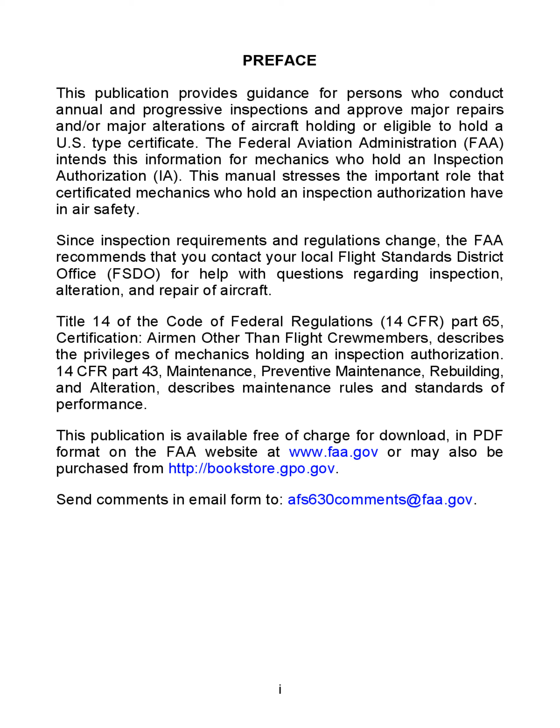This publication is available free of charge for download in PDF format on the FAA website at www.faa.gov, or may also be purchased from http://bookstore.gpo.gov. Send comments via email to afs630comments@faa.gov. Chapter 1: Renewal and Change of Fixed Base, Notification of Change of Fixed Base.

When the holder of an inspection authorization, IA, moves the base of operation to a different Flight Standards District Office, FSDO, or International Field Office, IFO, area, the receiving office must be notified in writing before exercising the privileges of the authorization. Expiration of an inspection authorization.

The IA expires every odd-numbered year, 2015, 2017, etc., on March 31st. An IA holder must continue to meet the yearly requirements of Title 14 Code of Federal Regulations, 14 CFR, Part 65, Section 65.93, in order to retain the authorization. Yearly means April 1st through March 31st.

Renewal of inspection authorization. Renewal application paperwork. Application for renewal requires the following: 1. Evidence the applicant still meets the requirements of 14 CFR Section 65.91c, 1 through 4. 2. Completed FAA Form 8610-1, Mechanic's Application for Inspection Authorization, in duplicate. Refer to Appendix 1, Figure 1.

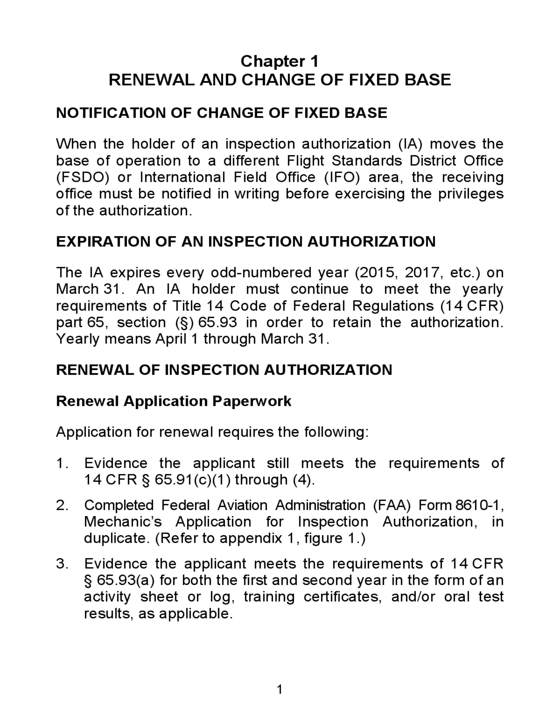3. Evidence the applicant meets the requirements of 14 CFR Section 65.93a for both the first and second year, in the form of an activity sheet or log, training certificates, and/or oral test results, as applicable. 4. Verification of the applicant's activities by the jurisdictional FSDO or IFO for renewal at an office other than the jurisdictional office. 5. Evidence that an applicant employed by a repair station personally inspected, performed, and returned aircraft to service, in addition to the signed application.

Eligibility. Meeting the requirements of 14 CFR Section 65.93 does not mean that the applicant must meet all 5 of the listed requirements. To be eligible for renewal of an IA for a 2-year period, the applicant must show completion of one of the activities by March 31st of the first year and completion of one during the second year.

For instance, the applicant may show evidence of having performed at least one annual inspection for each 90 days during the first year and meet the same requirement for the second year, for a total of 8 annuals prior to the renewal date to qualify for renewal.

The same logic applies to major repairs and major alterations or training. The number of annual inspections, major repairs, and major alterations performed cannot be mixed to meet a single year's requirement, simply because 14 CFR Section 65.93 does not provide for such combinations. However, the applicant can meet one requirement of 14 CFR Section 65.93a for the first year and a different requirement for the second year to qualify for renewal.

Note: an inspection program required under 14 CFR Part 91, Section 91.409e, is not acceptable as IA activity. Partial inspections, such as phases or events on more than one aircraft, are not acceptable as activity. A progressive inspection is a complete inspection on one identified aircraft that completes a cycle each 12 calendar months.

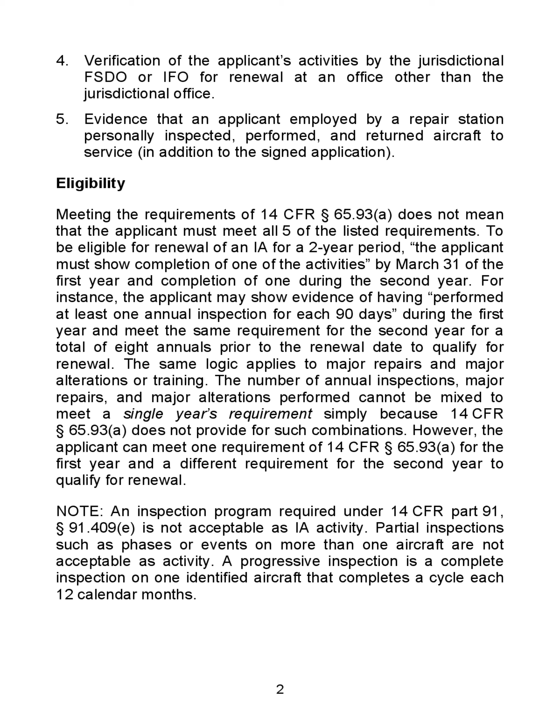Approved training renewal option. Successful completion of an 8-hour refresher course, acceptable to the Administrator, in one of the 12-month periods preceding the renewal application, includes the following requirements: 1. The refresher course must contain subjects directly related to aircraft maintenance, inspection, repairs, and alterations. In addition, some non-technical subjects, such as human factors or professionalism as they relate to maintenance personnel, may be acceptable. Training must not be used to promote a new or existing product.

2. The instructional requirements of Section 65.93a(4) may be met by accumulating at least 8 hours of maintenance training each year.

Each person who intends to use 8 hours of instruction each year to meet Section 65.93a(4) must, at the time of renewal, provide proof of attendance for instruction received. Acceptable proof of attendance consists of a certificate of training or similar document showing the name of the course, name of attendee, course identification number, expiration date, description of the course content, time in hours, the date, location, and course instructor's name and signature.

All FSDOs and IFOs must accept, without further showing, maintenance technical training conducted by a manufacturer or its authorized representative on its Type Certificate (TC), Supplemental Type Certificate (STC), Technical Standard Order (TSO), or Parts Manufacturer Approval (PMA) product, component, or accessory that is considered acceptable to the administrator and in compliance with this policy.

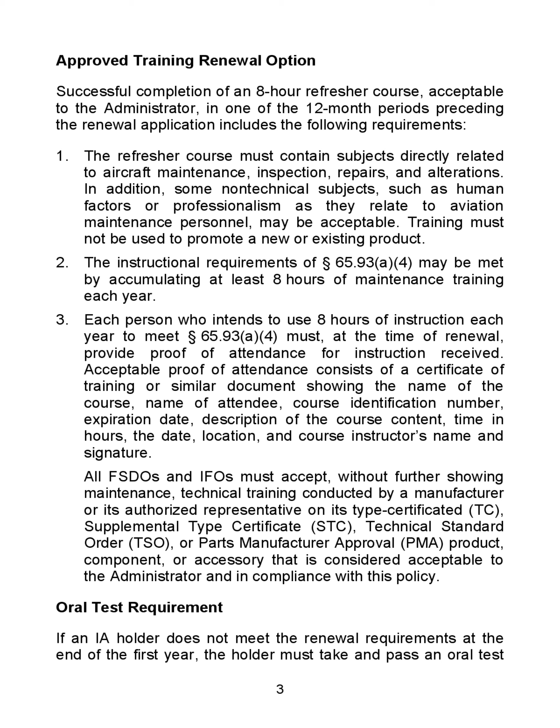Oral test requirement. If an IA holder does not meet the renewal requirements at the end of the first year, the holder must take and pass an oral test administered at their local Flight Standards District Office or International Field Office prior to exercising the privileges of their certificate in the second year. The oral test, given by an Aviation Safety Inspector (ASI), is to ensure that the applicant's knowledge of regulations and standards are current, and requires a passing grade of 70%.

A failure of the oral test will result in non-renewal of the IA. The ASI administering the oral test will provide the IA with evidence of passing or failing the test in the form of written documentation. The applicant should retain the oral test results.

Renewal notes. First year note: the holder of an IA issued less than 90 days before March 31st of the first, even year, need not comply with Section 65.93a(1) through (5) for the first year of the 2-year authorization period. Second year note: the holder of an IA issued less than 90 days before the expiration date, March 31st of the odd year, does not need to comply with Section 65.93a(1) through (5) for that quarter, but the IA holder still needs to apply for a renewal.

A completed example of the IA authorization card, FAA Form 8310-5, is shown in Appendix 1, Figure 2.

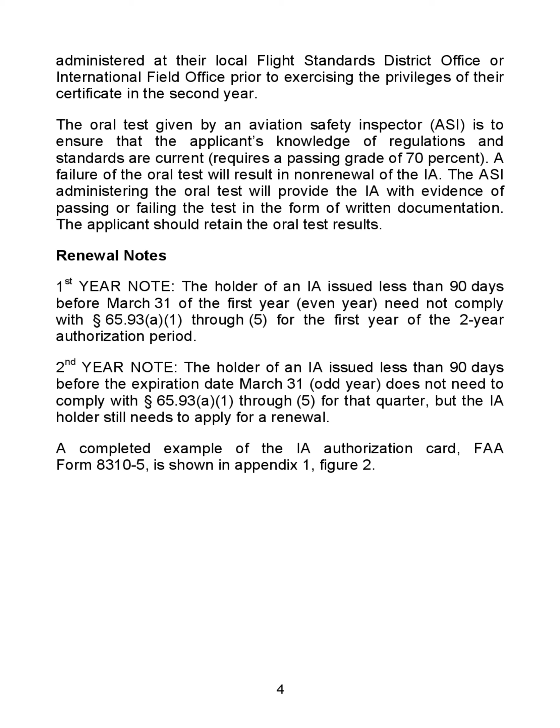Chapter 2: Basic Functions of the Inspection Authorization. General. The basic functions of the holder of an Inspection Authorization (IA) are set forth in Title 14 of the Code of Federal Regulations, 14 CFR, Part 65, Section 65.95.

With the exception of aircraft maintained in accordance with a continuous airworthiness maintenance program under Part 121, an IA may inspect and approve for return to service any aircraft or related part or appliance after a major repair or major alteration. Also, the holder of an IA may perform an annual inspection and may supervise or perform a progressive inspection. Approving major repairs and major alterations: what to look for during an inspection.

A primary responsibility of the holder of an IA is to determine airworthiness by inspecting repairs or alterations for conformity to approved data, and assuring that the aircraft is in a condition for safe operation. During inspection of major repairs or major alterations, the holder of an IA must also determine that they are compatible with previous repairs and alterations that have been made to the aircraft.

The holder of an IA must personally perform the inspection. The regulations do not provide for delegation of this responsibility. Approving major repairs and major alterations is a serious responsibility. The approval action should consist of a detailed investigation to establish at least that...

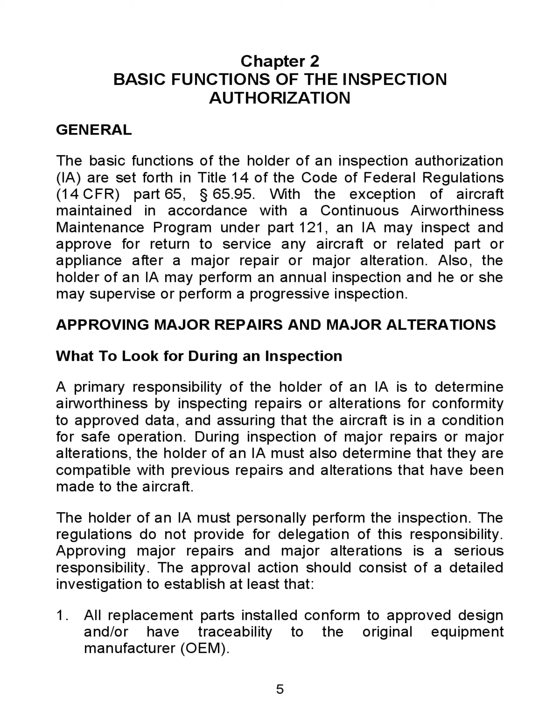1. All replacement parts installed conform to approved design and/or have traceability to the original equipment manufacturer (OEM). 2. As installed, the installation conforms to approved data that is applicable to the installation. 3. Workmanship meets the requirements of 14 CFR Part 43, Section 43.13. The aircraft or product is equal to its original or properly altered condition.

4. The data used is appropriate to the Aircraft Certification Rule, CAR 3, 14 CFR Part 23, etc. 5. Work is complete and compatible with other structures or systems.

The holder of an IA cannot approve the data for major repairs or major alterations. He or she may, however, inspect to see that alterations conform to data previously approved by the administrator, per 14 CFR Part 65, Section 65.95. This means the holder of an IA ensures that approved data is available and is used as the basis for the approval. This availability determination should be made prior to beginning the repair or alteration.

If data is unavailable, or if the holder of an IA is unsure of the acceptability of the available data, the local Aviation Safety Inspector (ASI) should be consulted.

The ASI may, as circumstances warrant, be able to: one, establish an acceptable basis for approval; two, approve the data; or three, recommend application for a supplemental type certificate.

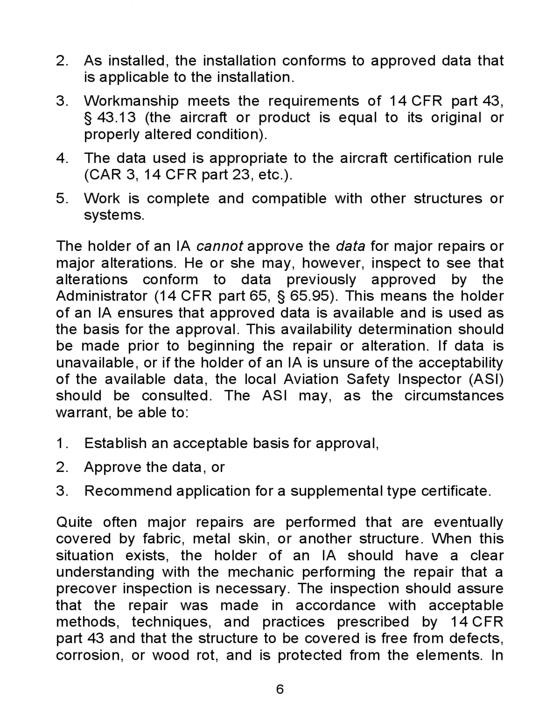The inspection should assure that the repair was made in accordance with acceptable methods, techniques, and practices prescribed by 14 CFR Part 43, and that the structure to be covered is free from defects, corrosion, or wood rot, and is protected from the elements. In addition, the holder should inspect other affected areas for hidden damage if the aircraft has been involved in an accident or incident.

An entry is required to be made in the maintenance record, and FAA Form 337, Major Repair and Alteration, must be completed. Refer to Appendix 1, Figure 3, showing typical entries on the front and back of FAA Form 337.

Minor deviation from approved data is permissible if the change is one that could be approved as a minor alteration when considered alone. Be sure to list the deviations on FAA Form 337 and make an entry in the maintenance record when completing the aircraft records. When in doubt, contact the local ASI, who may decide the change is not minor and would need specific approval or an amendment of the original approval.

Approved data: substantiating and descriptive technical data sources used to make a major repair or alteration that is approved by the administrator include those on the following list.

One, Type Certificate Data Sheets, TCDS. Two, Supplemental Type Certificate, STC, data, provided it specifically applies to the item being repaired or altered. Such data may be used in whole or in part as included within the design data associated with the STC. Three, appliance manufacturers' manuals or instructions, unless specifically not approved by the administrator, are approved for major repairs.

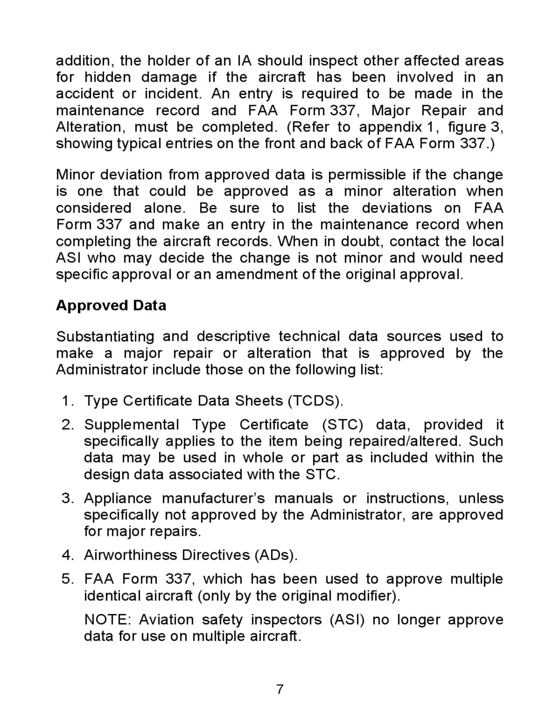Six, U.S. Civil Aviation Authority, CAA, Form 337, dated before October 1, 1955. Seven, FAA-approved portions of SRMs. Eight, Designated Engineering Representative, DER-approved data, only when approval is authorized under his or her specific delegation. Nine, Organization Designation Authorization, ODA-approved data, when the major alteration is performed specific to the authorization granted.

Ten, data in the form of an appliance type approval issued by the Minister of Transport Canada for those parts or appliances for which there is no current Technical Standard Order, TSO, available. The installation manual provided with the appliance includes the Transport Canada certificate, as well as the date of issuance and an environmental qualification statement.

Eleven, foreign bulletins, for use on U.S. certificated foreign aircraft, when approved by the foreign authority. Twelve, data describing an article or appliance used in an alteration that is FAA approved under a TSO. As such, the conditions and tests required for TSO approval of an article are minimum performance standards.

The article may be installed only if further evaluation by the operator or applicant documents an acceptable installation which may be approved by the administrator. Thirteen, data describing a part or appliance used in an alteration which is FAA approved under a Parts Manufacturer Approval, PMA. An STC may be required to obtain a PMA as a means of assessing airworthiness and/or performance of the part.

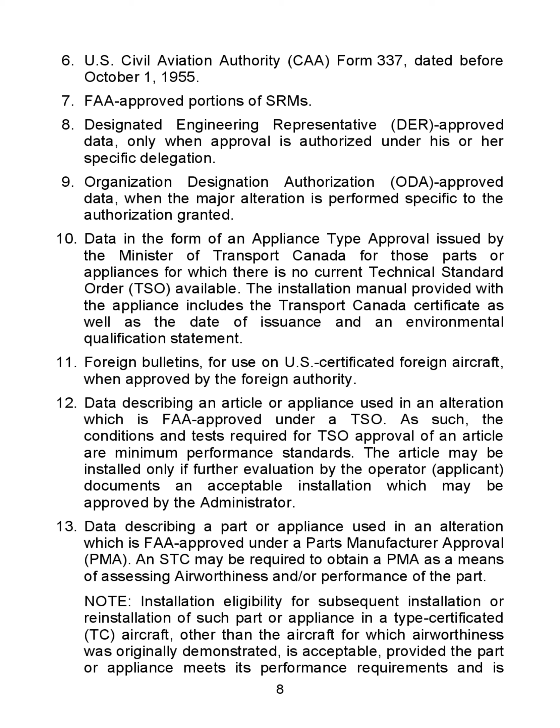Note: installation eligibility for subsequent installation or reinstallation of such part or appliance in a type certificated aircraft, other than the aircraft for which airworthiness was originally demonstrated, is acceptable, provided the part or appliance meets its performance requirements and is operationally compatible for installation.

The operator or applicant must provide evidence of previously approved installation by TC, STC, or field approval on FAA Form 337, that will serve as a basis for follow-on field approval.

Fourteen, any FAA-approved service bulletins, SB, and letters or similar documents, including DER approvals. Fifteen, foreign bulletins as applied to a U.S. certificated product made by a foreign manufacturer located within a country with whom a bilateral agreement, BA, is in place, and by letter of specific authorization issued by the Foreign Civil Air Authority.

The bilateral website is located at http://www.faa.gov/aircraft/air_cert/international/bilateral_agreements/baa_basa_listing. Sixteen, other data approved by the administrator. Seventeen, Advisory Circular, AC, 43.13-1, current edition, for FAA-approved major repairs on non-pressurized areas of aircraft only, when the user determines that it is...

Appropriate to the product being repaired, directly applicable to the repair being made, and not contrary to the airframe, engine, propeller, product, or appliance manufacturer's data.

18. AC 43.13-2, Current Edition, for FAA-approved major alterations on non-pressurized areas of aircraft 12,500 pounds gross weight or less, only when the user determines that it is appropriate to the product being repaired, directly applicable to the alteration being made, and not contrary to the airframe, engine, propeller, product, or appliance manufacturer's data.

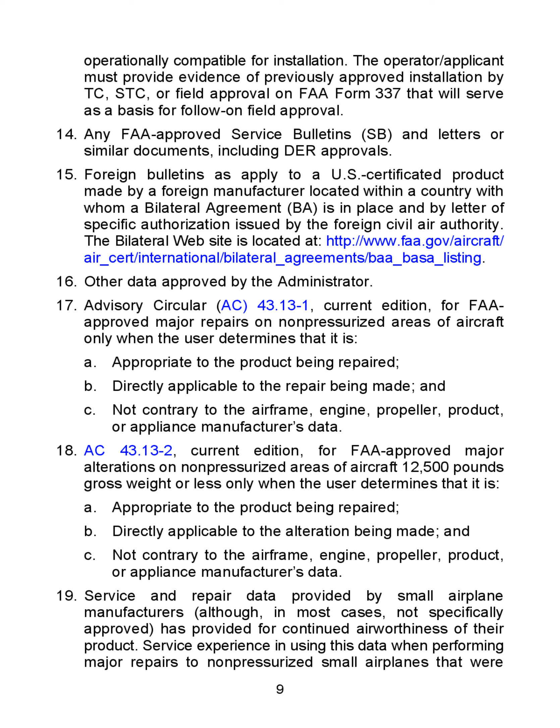19. Service and repair data provided by small airplane manufacturers, although in most cases not specifically approved, has provided for continued airworthiness of their product. Service experience using this data when performing major repairs to non-pressurized small airplanes originally type certificated before January 1, 1980, has proven very reliable if followed with no deviations. When used in this manner, the manufacturer's data, with page, paragraph, etc., must be referenced on FAA Form 337 in Block 8.

Components of the inspection. The basic operations of inspecting repairs or alterations consist of: 1. Determine that the repair or alteration data has FAA approval. 2. Inspect the configuration of the repair or alteration for conformity to the approved data and the performance standards of 14 CFR Part 43. At the same time, the aircraft should still comply with applicable airworthiness requirements, and the repair or alteration should be compatible with all other installations.

3. Ensure that all operating limitations affected by an alteration are appropriately revised. Sometimes limitations are in the form of flight manual supplements, instrument range markings, placards, or combinations of these. See the local FSDO for limitations on changes which can be made.

4. Determine that aircraft record entries have been made and the weight and balance data and equipment list have been revised, when appropriate. There should be a statement on the FAA Form 337 to the effect that the weight and balance data and equipment list have been revised.

When an alteration results in a change in the center of gravity, CG, position, the affected CG limit should be investigated under adverse loading conditions unless the new CG falls within an approved empty CG range. For instance, if the CG is shifted aft, the loading conditions should be computed to see that the aircraft does not exceed the aft CG limit.

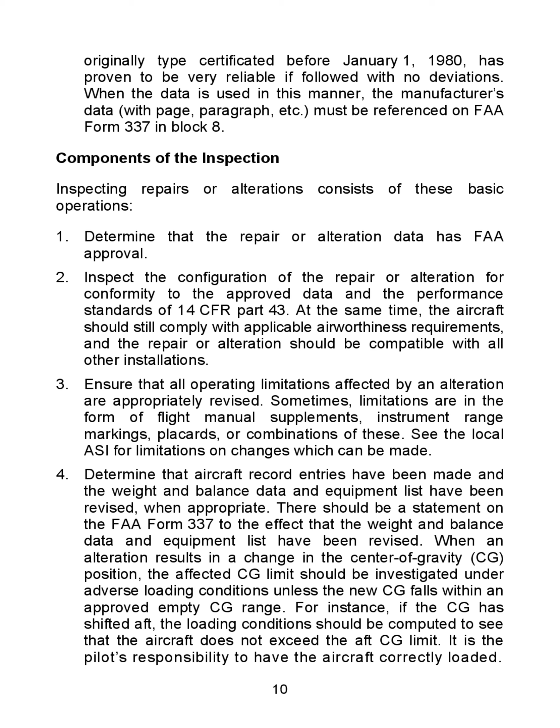It is the pilot's responsibility to have the aircraft correctly loaded. However, when approving an alteration, it is the IA's responsibility to see that weight and balance data have been revised.

The aircraft record entries may refer to the FAA Form 337 for details, such as: installed STOL kit in accordance with STC SA940CE, drawing number 5084, dated April 24, 1996. See FAA Form 337, this date, for details. Indicate approval in Block 7 of FAA Form 337, and return both copies to the person who performed the work, for disposition in accordance with 14 CFR Part 43, Appendix B.

Annual and progressive inspections. The procedures and scope for annual inspections are set forth in 14 CFR Part 43, Appendix D, and should be followed in detail. The scope and detail for a progressive inspection is established by the owner or operator in accordance with 14 CFR Part 91, Section 91.409d. There are additional requirements for annual and progressive inspections listed in 14 CFR Part 43, Section 43.15.

The scope and detail of 100-hour and annual inspections are the same. Record entries are very important, as they are the only evidence an aircraft owner has to show compliance with the inspection requirements of 14 CFR Part 91, Section 91.409. Refer to Appendix 1, Figure 4, of this manual.

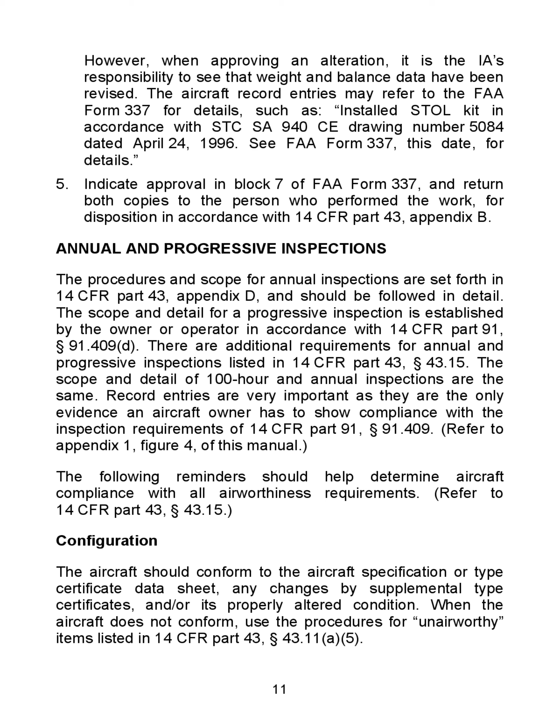When the aircraft does not conform, use the procedures for unairworthy items listed in 14 CFR Part 43, Section 43.11a. 1. Alterations to the product may have changed some of the operating limitations. 2. Unrecorded alterations or repairs may have been made in the past and warrant one of the following: a. Contacting the owner for pertinent information.

b. Conducting an inspection and personally approving for return to service by completing FAA Form 337, if approved data is available. c. Contacting the local ASI for assistance. 3. The aircraft specification or type certificate data sheet indicates when a flight manual is required.

It also identifies limitations which must be displayed in the form of markings and placards. Unlike the specifications, type certificate data sheets do not contain a list of equipment approved for a particular aircraft. The list of required and optional equipment can be found in the equipment list furnished by the manufacturer of the aircraft. Sometimes a later issue of the list is needed to cover recently approved items. Serial number eligibility should always be considered.

Condition: the holder of an IA may use the checklist in 14 CFR Part 43, Appendix D, the manufacturer's inspection sheets, or a checklist designed by the holder of an IA that includes the scope and detail of the items listed in Appendix D, to check the condition of the entire aircraft. This includes checks of the various systems listed in 14 CFR Part 43, Section 43.15.

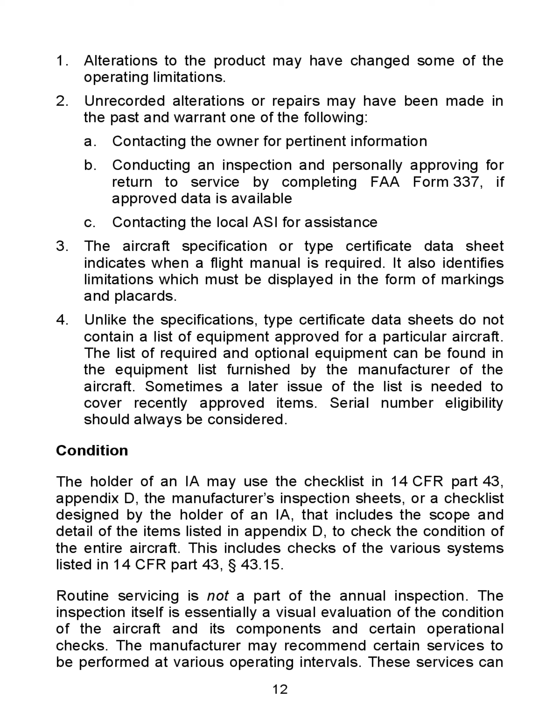Routine servicing is not a part of the annual inspection. The inspection itself is essentially a visual evaluation of the condition of the aircraft and its components and certain operational checks. The manufacturer may recommend certain services to be performed at various operating intervals. These services can, often in fact should, be done conveniently during an annual inspection, but are not considered to be a part of the inspection itself.

It is very important that the holder of an IA be familiar with the manufacturer's service manuals, bulletins, and letters for the product being inspected. Use these publications to avoid overlooking problem areas.

AC 43-16A, Aviation Maintenance Alerts, is also an important source of service experience. The articles for the alerts are taken from selected service difficulties reported to the FAA on Form 8010-4, Malfunction or Defect reports. Monthly copies of the alerts are provided on the Internet at www.faa.gov under the Aircraft tab, and then under Aircraft Safety.

Comments may be sent by letter, with name and address typed or legibly printed, to Federal Aviation Administration, Aviation Data Systems Branch, AFS 620, P.O. Box 25082, Oklahoma City, Oklahoma 73125.

When the holder of an IA approves an aircraft for return to service, he or she will be held responsible for the condition of the aircraft as of the time of approval.

Minimum Equipment List. The Minimum Equipment List, MEL, is intended to permit operations with certain inoperative items of equipment for the minimum period of time necessary until repairs can be accomplished. It is important that repairs are accomplished at the earliest opportunity in order to return the aircraft to its design level of safety and reliability.

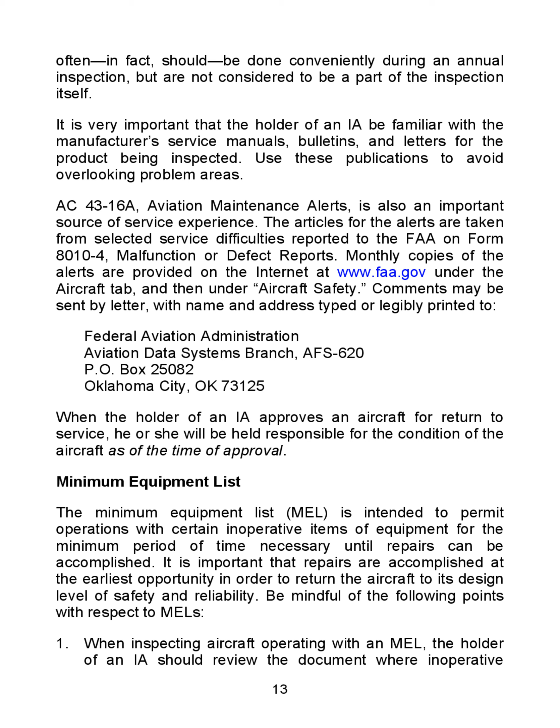Be mindful of the following points with respect to MELs. First, when inspecting aircraft operating with an MEL, the holder of an IA should review the document where inoperative items are recorded - aircraft maintenance record, logbook, discrepancy record, etc. to determine the state of airworthiness with regard to those recorded discrepancies. Inspections of aircraft with approved MELs will be in accordance with 14 CFR under which the MEL was issued.

Second, those MELs specifying repair intervals through the use of A, B, C, D codes require repairs of deferred items at or prior to the repair times established by the letter designated category. In such instances, some items previously deferred may not be eligible for continued deferral at the inspection, or may require additional maintenance. Where repair intervals are not specified by codes in the MEL, all MEL-authorized inoperative instruments and/or equipment should be repaired or inspected and deferred before approval for return to service.

Third, aircraft established on a progressive inspection program require that all MEL-authorized inoperative items be repaired or inspected and deferred at each inspection, whether or not the item is encompassed in that particular segment.

Fourth, when inspecting aircraft operating without an MEL, 14 CFR Part 91, Section 91.213d, allows certain aircraft not having an approved MEL to be flown with inoperative instruments and/or equipment. These aircraft may be presented for annual or progressive inspection with such items previously deferred, or may have inoperative instruments and equipment deferred during an inspection.

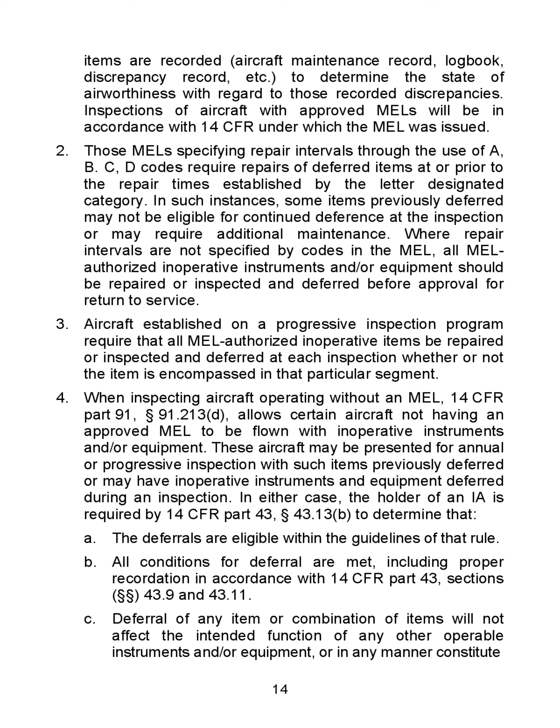In either case, the holder of an IA is required by 14 CFR Part 43, Section 43.13b, to determine that: a) the deferrals are eligible within the guidelines of that rule; b) all conditions for deferral are met, including proper recordation in accordance with 14 CFR Part 43, Sections 43.9 and 43.11; c) deferral of any item or combination of items will not affect the intended function of any other operable instruments and/or equipment, or in any manner constitute a hazard to the aircraft.

When these requirements are met, such an aircraft is considered to be in a properly altered condition with regard to those deferred items. Airworthiness Directives.

The holder of an IA is required by 14 CFR Part 43, Section 43.13, to determine that all applicable ADs for aircraft, power plants, instruments, propellers, and appliances have been accomplished. You must consider the following.

If the maintenance records indicate compliance with an AD, the holder of an IA should make a reasonable attempt to verify the compliance. It is not uncommon for a component to have compliance with an AD accomplished and properly recorded, then later be replaced by another component on which the AD has not been accomplished. The holder of an IA is not expected to disassemble major components—cylinders, crankcases, etc.—if adequate records of compliance exist.

When the maintenance records do not contain indications of AD compliance, the holder of an IA should: a) make the AD an item on a discrepancy list provided to the owner, in accordance with 14 CFR Part 43, Section 43.11b; b) with the owner's concurrence, do whatever disassembly is required to determine the status of compliance; or c) obtain concurrence of the owner to comply with the AD.

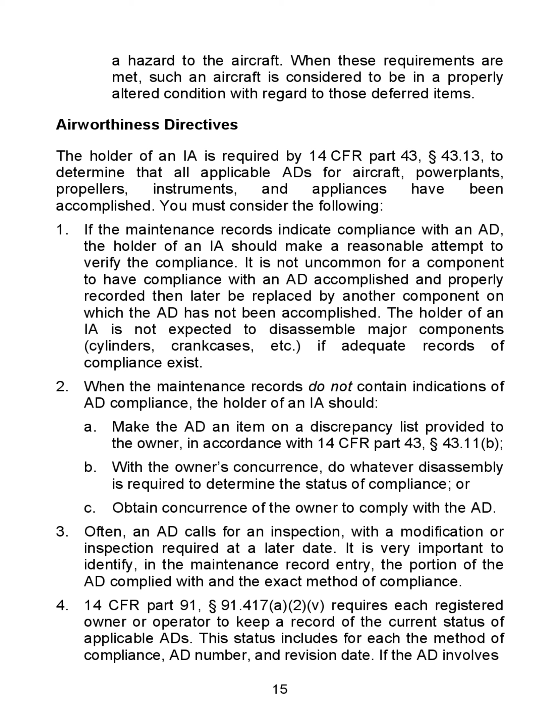14 CFR Part 91, Section 91.417a 2v, requires each registered owner or operator to keep a record of the current status of applicable ADs. This status includes, for each, the method of compliance, AD number, and revision date. If the AD involves recurring action, the time and date should be recorded when the next action is required.

As a vital part of the services performed, the holder of an IA may wish to provide the owner with information he or she is expected to keep. Refer to Appendix 1, Figure 5.

The owner should also be informed of any subsequent requirements of an AD or whether a re-inspection is required at operating intervals other than at annual inspections. The subsequent requirements are at 100-hour intervals and will need to be done whether or not the aircraft requires 100-hour inspections. Where a progressive inspection is involved, the approved program should state how and when the AD review will be accomplished.

However, as a mechanic or IA, you should be aware of an AD that is pending or due, and is not in the area you are inspecting. It is good customer relations to inform the owner or pilot of the situation.

Malfunction or defect reports: all malfunctions or defects that come to the attention of the holder of an IA should be reported on FAA Form 8010-4. Refer to Appendix 1, Figure 6. Copies of the self-addressed form are available at all Flight Standards District Offices, FSDOs.

It is easy to complete and requires no postage. The form can also be completed online at www.faa.gov, under the Aircraft tab, and then under Report Safety Issues. Prompt reporting will contribute much toward improving air safety by helping correct unsafe conditions.

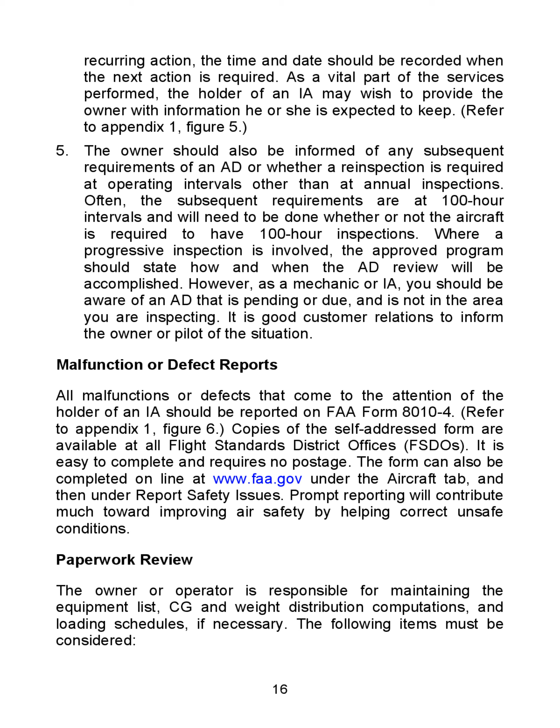Paperwork review. The owner or operator is responsible for maintaining the equipment list, CG and weight distribution computations, and loading schedules, if necessary. The following items must be considered.

The holder of an IA is required by 14 CFR Part 43, Section 43.13, to determine that the required placards and documents set forth in the aircraft specification or type certificate data sheet are available and current. The aircraft should be reported as being in an unairworthy condition if these placards and documents are not available.

A missing, incorrect, or improperly located placard is considered an unairworthy item, and the owner or operator should be informed that, under the requirements of 14 CFR Part 91, Section 91.9, the aircraft may not be operated until a correct and properly placed placard is available.

The holder of an IA should refer to the registration and airworthiness certificates for the owner's name and address, and the aircraft make, model, registration, and serial numbers needed for recording purposes. Be sure not to use manufacturer trade names, as they do not always coincide with the actual model designation. The Cessna Skylane model designation is 182; the Piper Seneca 3 is PA-34-220T, etc.

If registration and airworthiness certificates are not available, the aircraft does not need to be reported in an unairworthy condition. However, the owner or operator should be informed that the documents required by 14 CFR Part 91, Section 91.203a2, should be in the aircraft, and the airworthiness certificate displayed when the aircraft is operated.

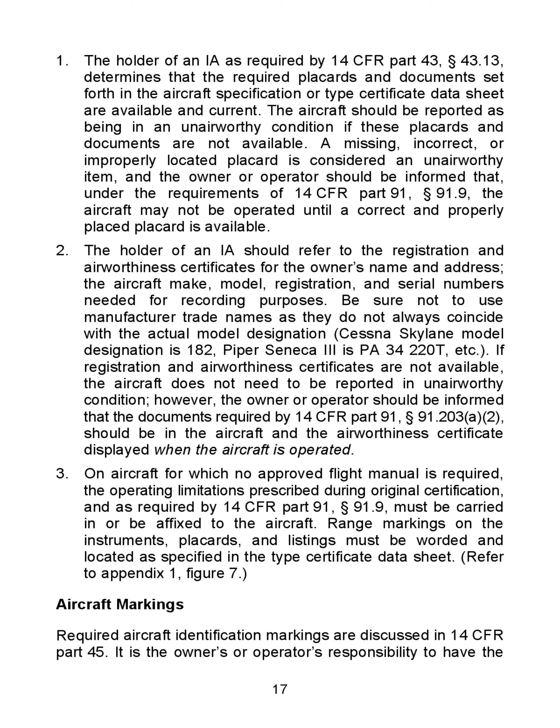Aircraft markings. Required aircraft identification markings are discussed in 14 CFR Part 45. It is the owner's or operator's responsibility to have the nationality and registration markings properly displayed on the aircraft, per 14 CFR Part 91, Section 91.9c. The holder of an IA can and should offer advisory service to owners and operators regarding any deficiencies in markings. However, such deficiencies are not cause to report an aircraft in unairworthy condition.

Aircraft with discrepancies or unairworthy conditions: if the aircraft is not approved for return to service after a required inspection, use the procedures specified in 14 CFR Part 43, Section 43.11. This will permit an owner to assume responsibility for having the discrepancies corrected prior to operating the aircraft.

Discrepancies or unairworthy conditions can be resolved in the following ways. First, the discrepancies can be cleared by a person who is authorized by 14 CFR Part 43 to do the work. Preventive maintenance items could be cleared by a pilot who owns or operates the aircraft, provided the aircraft is not used under 14 CFR Part 121, 129, or 135, except that approval may be granted to allow a pilot operating a rotorcraft in a remote area under 14 CFR Part 135 to perform preventive maintenance.

Second, the owner may want the aircraft flown to another location to have repairs completed, in which case the owner should be advised that the issuance of FAA Form 8130-7, Special Flight Permit, is required. This form is commonly called a ferry permit and is detailed in 14 CFR Part 21, Section 21.197. The certificate may be obtained in person or by fax at the local FSDO or from a designated airworthiness representative.

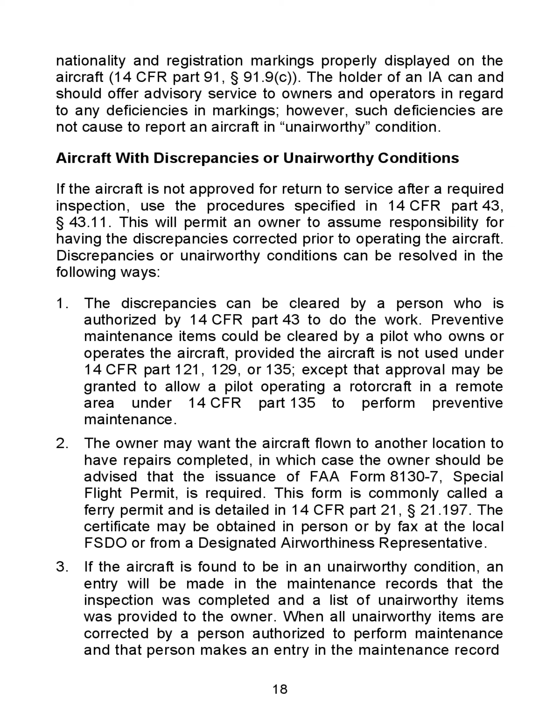Third, if the aircraft is found to be in an unairworthy condition, an entry will be made in the maintenance records that the inspection was completed and a list of unairworthy items was provided to the owner. When all unairworthy items are corrected by a person authorized to perform maintenance, and that person makes an entry in the maintenance record for the correction of those items, the aircraft is approved for return to service. Refer to Appendix 1, Figures 8 and 9.

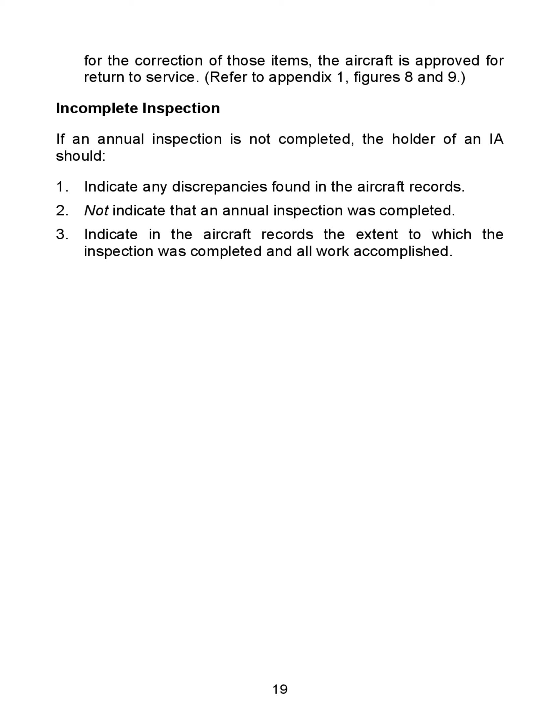Incomplete inspection. If an annual inspection is not completed, the holder of an IA should: one, indicate any discrepancies found in the aircraft records; two, not indicate that an annual inspection was completed; and three, indicate in the aircraft records the extent to which the inspection was completed and all work accomplished.

Chapter 3, Maintenance Records: Required Recordation. The holder of an IA and other maintenance personnel or agencies are required to record maintenance, inspections, or alterations performed or approved in accordance with the requirements of 14 CFR Part 43, Sections 43.9 and 43.11. The owner or operator is required by 14 CFR Part 91, Section 91.417 to keep maintenance records. The holder of an IA is also required to indicate the total aircraft time in service when a required inspection is done.

Responsibility for maintenance work performed rests with the person whose signature and certificate number is entered on the appropriate maintenance record and/or forms. The responsibility for annual and progressive inspections and approval for return to service after major repairs or major alterations is assumed by the holder of an IA whose signature and certificate number appears on the appropriate maintenance records.

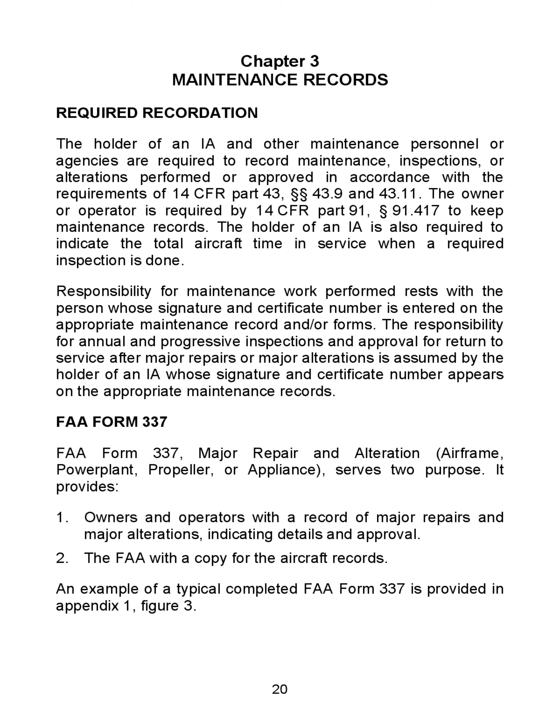FAA Form 337. FAA Form 337, Major Repair and Alteration, Airframe, Power Plant, Propeller, or Appliance, serves two purposes. It provides: one, owners and operators with a record of major repairs and major alterations, indicating details and approval; and two, the FAA with a copy for the aircraft records. An example of a typical completed FAA Form 337 is provided in Appendix 1, Figure 3.

Completion: the person who performed or supervised the major repair or major alteration prepares the original FAA Form 337, 2 originals. Instructions for the completion of FAA Form 337 appear in AC 43.9-1, as revised, Instructions for Completion of FAA Form 337, Major Repair and Alteration, Airframe, Power Plant, Propeller, or Appliance. The holder of an IA then further processes the forms when they are presented for approval. If the IA holder finds a major alteration or a major repair to be in conformity with FAA-approved data, the IA holder must review the FAA Form 337 for completeness and accuracy, and complete Item 7.

The IA holder should ensure that the duplicate is an exact and legible reproduction of the original. Signatures should be original in ink, and not carbon copies.

Disposition: in accordance with 14 CFR Part 43, the person performing a major repair or major alteration must make the proper entry in the maintenance records and distribute the originals of the completed and signed FAA Form 337 to the aircraft owner and the FAA.

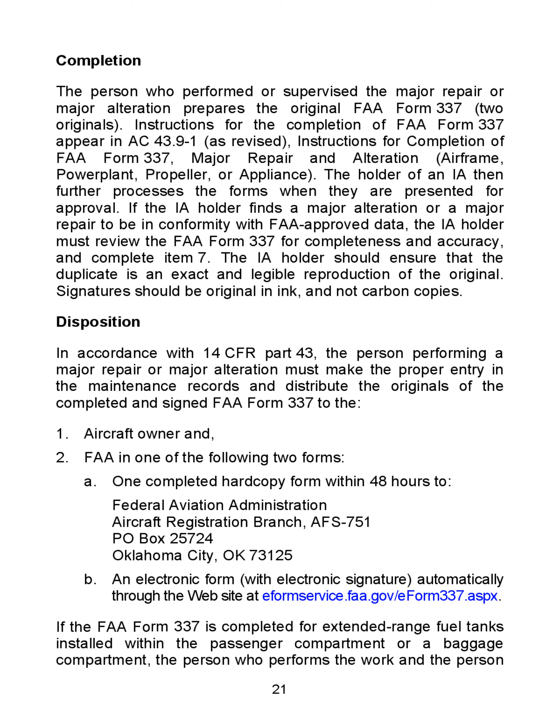the person who performs the work and the person authorized to approve the work by 14 CFR Part 43, Section 43.7, must execute an FAA Form 337 in at least triplicate, as required by 14 CFR Part 43, Appendix B. One copy of the FAA Form 337 must be placed on board the aircraft, as specified in 14 CFR Part 91, Section 91.417d.

The remaining copies are distributed as previously mentioned. If FAA Form 337 has been completed for engines, propellers, spare parts or components, both copies of the form, with the approval portion completed, should be attached to the part or component until it is installed on an aircraft.

The mechanic who makes the installation will, in accordance with 14 CFR Part 43, Section 43.9a(4), complete both copies of FAA Form 337 by filling in blocks 1 and 2, and sign for the installation in the aircraft records, making reference to the FAA Form 337 in the record entry. The copies are distributed as previously mentioned.

Weight and balance: weight and balance data is not required on the FAA Form 337. However, it is imperative that weight and balance checks be made very carefully. Since aircraft manufacturers use varying methods of weight and balance control, it is not feasible to provide a universally adaptable method. The example provided in Appendix 1, Figure 10, of this guide is general in nature and can be modified to suit the aircraft involved.

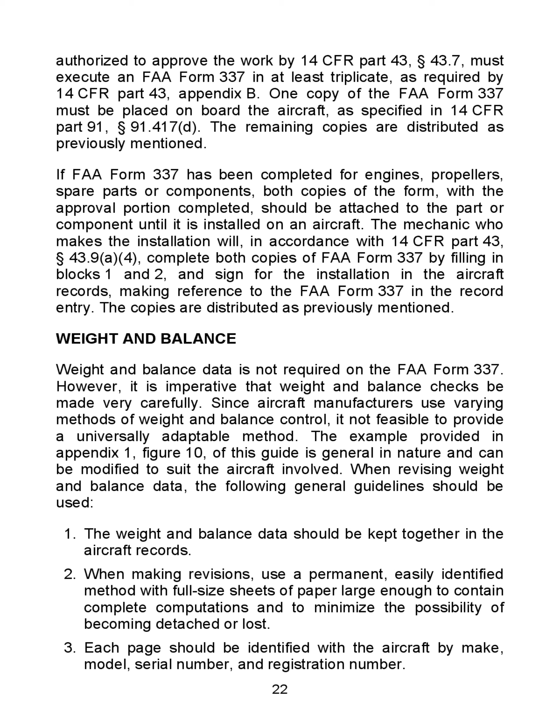When revising weight and balance data, the following general guidelines should be used: First, the weight and balance data should be kept together in the aircraft records. Second, when making revisions, use a permanent, easily identified method with full-size sheets of paper large enough to contain complete computations and to minimize the possibility of becoming detached or lost. Third, each page should be identified with the aircraft by make, model, serial number, and registration number. Fourth, the pages should be signed and dated by the person making the revision.

Fifth, the nature of the weight change should be described. Sixth, the old weight and balance data should be marked superseded and dated. Seventh, a new page should show the date of the old figures it supersedes. Eighth, appropriate fore and/or aft extreme loading conditions should be investigated and the computations shown. Ninth, example loading computations may be helpful.

Tenth, on large aircraft, be careful to distinguish between empty weight and operating weights that may include commissary supplies, spare parts, lavatory water, etc. Eleventh, on small aircraft, it is often convenient to post a placard in the aircraft indicating the empty weight, useful load, empty CG, and example loadings or general instructions to cover likely loading conditions.

Refer also to 14 CFR Section 91.9b(2). AC 120-27, as revised, Aircraft Weight and Balance Control, and FAA-H-8083-1, as revised, Aircraft Weight and Balance Handbook, contain useful information applicable to the functions performed by the holder of an IA on general aviation aircraft.

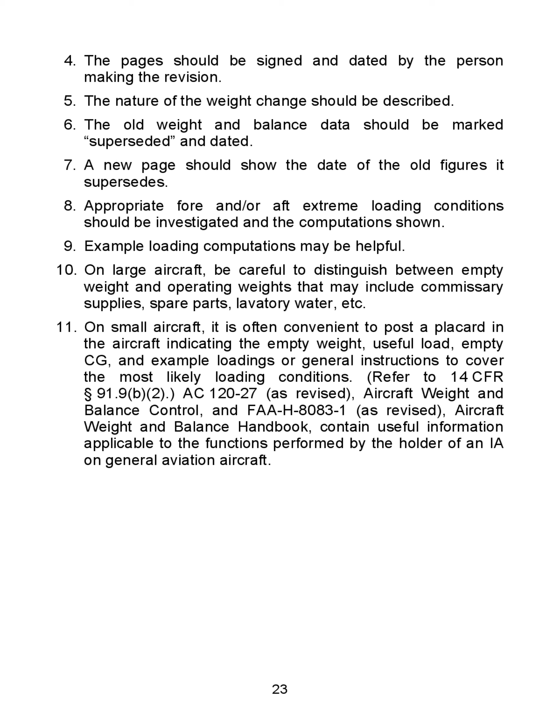Chapter 4: suggestions for developing good owner/IA relations. Be sure to come to a mutual agreement with the aircraft owner concerning exactly what work is to be performed. Misunderstandings usually result from a lack of clear communication. Get it straight - attention to the following details will usually avoid the ill will a later disagreement could generate.

First, itemize the work to be done so the owner will have a clear understanding of the work order. Second, establish a firm understanding about the cost, or range of cost, anticipated for the job. Third, if an annual inspection is involved, indicate that certain maintenance is required to perform the inspection, such as removing cowling and fairing and opening inspection plates, and cleaning the aircraft and engine.

Disassembling wheels and other components to determine their condition.

Advise the owner that the inspection involves an annual determination of compliance with aircraft specifications and ADs. Agree whether routine servicing is to be included as part of the inspection or performed separately. Such servicing is not part of the inspection, but may be conveniently done while conducting it.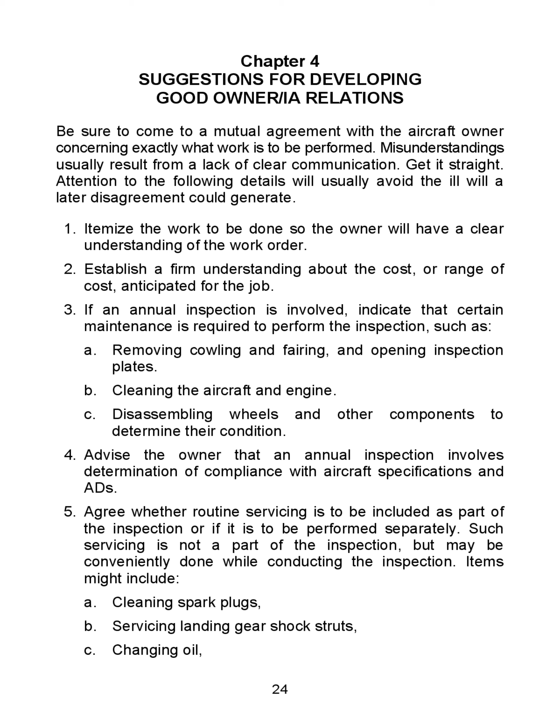Items might include: cleaning spark plugs, servicing landing gear shock struts, changing oil, making minor adjustments, servicing brakes, dressing nicked propeller blades, lubricating where necessary, or stop-drilling small cracks and minor patching of cowling and baffles.

The owner should be made aware that the annual or progressive inspection does not include correction of discrepancies or unairworthy items, and that such maintenance will be additional to the inspection.

Maintenance and repairs may be accomplished simultaneously with the inspection by a person authorized to perform maintenance, if the owner and the IA holder agree. This method would result in an aircraft that is approved for return to service upon completion of the inspection.

A written list of discrepancies and unairworthy items not repaired concurrently with the inspection must be made and given to the owner. Record uncorrected discrepancies and unairworthy items in the maintenance records.

The owner must make arrangements for correction or deferral of items on the list of discrepancies and unairworthy items with a person authorized to perform maintenance, prior to returning the aircraft to service.

The holder of the IA ensures that any item permitted to be inoperative by an MEL or under 14 CFR Part 91, Section 91.213(d)(2), is properly placarded and any maintenance for deferral has been performed. Any deferred items are to be included on the list of discrepancies and unairworthy items.

The owner should be informed that the aircraft should not be operated until the discrepancies and unairworthy items are corrected or are appropriately deferred.

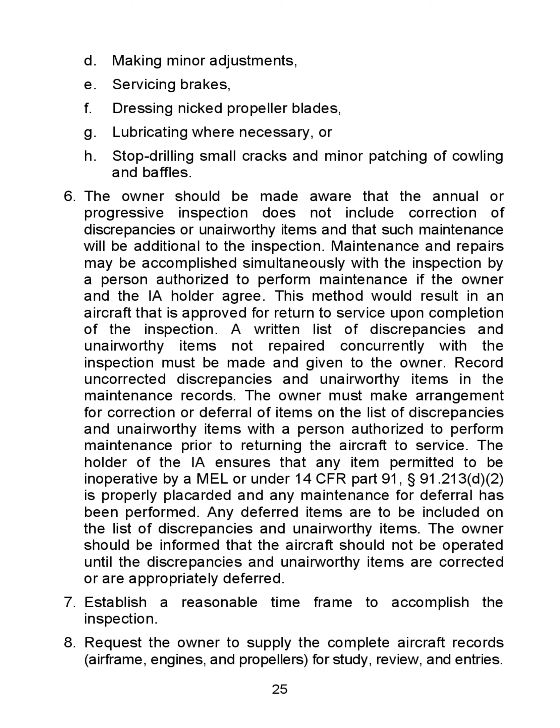Request the owner to supply the complete aircraft records for the airframe, engines, and propellers, for study, review, and entries. Point out that this is necessary to conduct an annual inspection properly.

Complete the inspection as soon as practicable. An aircraft can sit idle in a shop waiting for parts, even though the inspection has actually been completed. In this case, it is advisable to officially report the aircraft unairworthy.

Refer to 14 CFR Part 43, Section 43.11(a)(5). When the parts arrive, the repairs can be completed and the aircraft approved for return to service in the usual manner by the person who makes the repairs.

The time lapse may represent several weeks or months, and conditions can deteriorate on the aircraft. Also, there is a chance that an AD involving some part of the aircraft may have been issued in the interim. In these cases, it might be unwise to complete the repairs originally intended and sign off the aircraft as airworthy without doing another complete inspection.

Complete the aircraft record entries as required by 14 CFR Part 43, Sections 43.9 and 43.11, and provide sufficient information for the owner to comply with 14 CFR Part 91, Section 91.417(a)(2)(i). Make adequate descriptions of repairs or alterations if accomplished along with the inspection.

Record compliance with all ADs actually accomplished. Provide sufficient information for the owner to comply with 14 CFR Part 91, Section 91.417(a)(2)(v). A general statement such as 'all ADs complied with' is not an adequate entry and should be avoided.

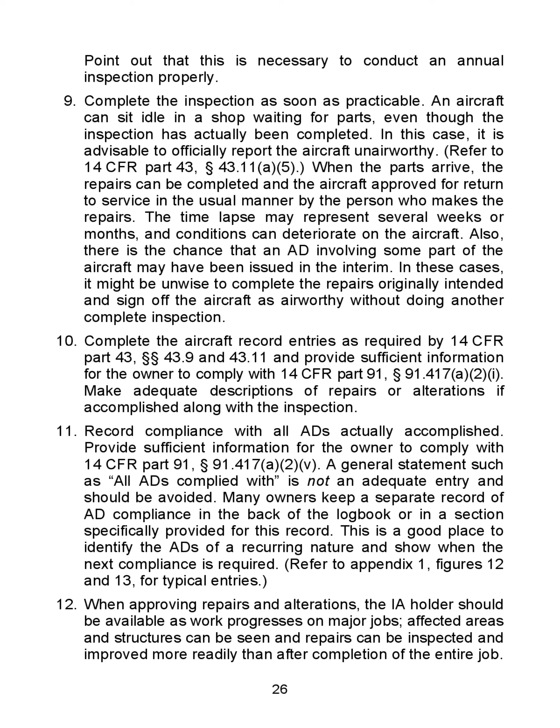When approving repairs and alterations, the IA holder should be available as work progresses on major jobs. Affected areas and structures can be seen, and repairs can be inspected and improved more readily than after completion of the entire job. Remind the owners or operators that they are responsible for operational requirements, such as:

VHF omnidirectional range, VOR, equipment checked in accordance with 14 CFR Part 91, Section 91.171. Altimeter and altitude reporting equipment tests and inspections in accordance with 14 CFR Part 91, Section 91.411. Air traffic control transponder inspection in accordance with 14 CFR Part 91, Section 91.413.

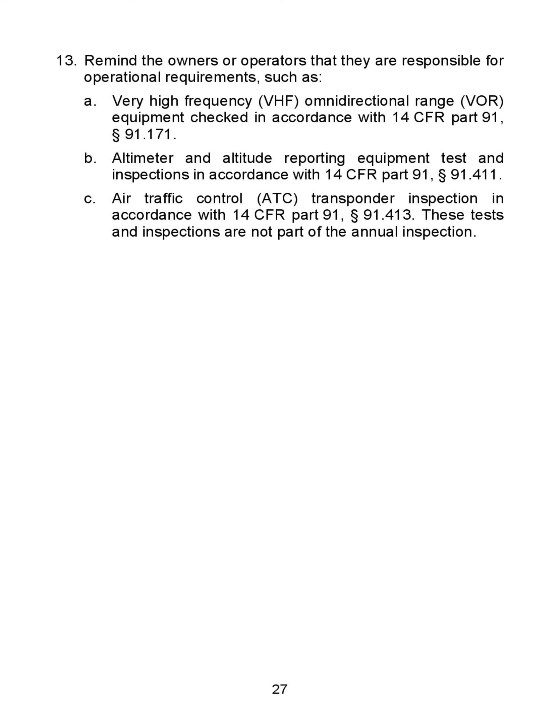These tests and inspections are not part of the annual inspection.